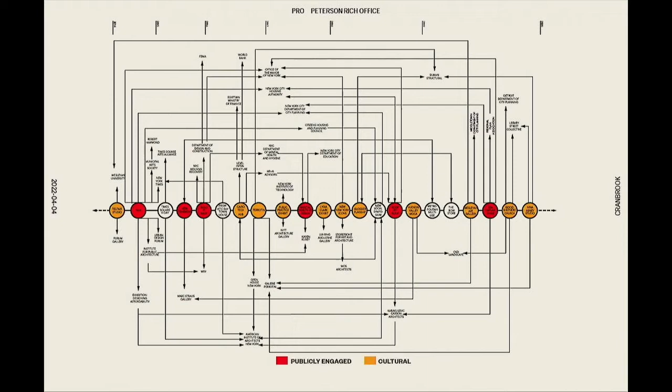Over the course of this timeline, starting at 2014 all the way on the left side of the image up to 2022 now, there's been this kind of ping-ponging back and forth between these two different types of projects. One of the things we've started to see happen as the office has developed, especially in the last few years, is this ping-ponging is slowing down, and instead of there being two separate tracks in the office, these two different types of work are starting to come together.

And the people that we're working with, the nature of the projects that we're working on, are both projects that engage the arts, like all of these yellow projects I was talking about, and also projects that engage issues related to the city, development, social issues.

And so the lecture, we're going to talk about let's say 5 or 6 projects. The last 2 are really one. It goes back and forth between these two different tracks and then ends on the projects we're doing here in Detroit, which really bring these two different lines of inquiry together.

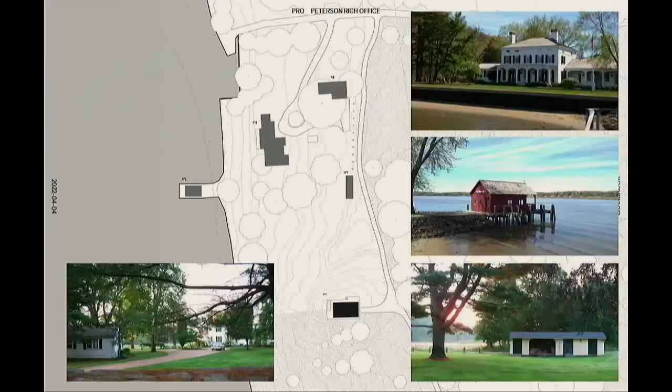Okay, so our first commission project was a painting studio in Lyme, Connecticut for an artist named Tula Telfair. The site was rich with history, located along the Connecticut River with beautiful views of the water. The site itself had served many functions over the years. It was originally the ferry terminal for Lyme, so the main house had been the terminal building. There's a beautiful boathouse floating above the water, and several other structures added over the years to create a kind of loose courtyard.

On one side, the Connecticut River, on the other side, a protected wetlands, and the owner and artist had asked us to design a studio for her in this beautiful landscape.

We had both come from past work experiences. I worked at Tod Williams Billie Tsien for 5 years, Nathan at Steven Holl, and we had spent our careers working on buildings of 100,000 square feet or more, large complex teams of architects inside and outside the office, spending many years working together to coordinate drawings, to start construction. And we were confronted with this kind of perfect little building that we would design, draw, and oversee the construction of completely on our own.

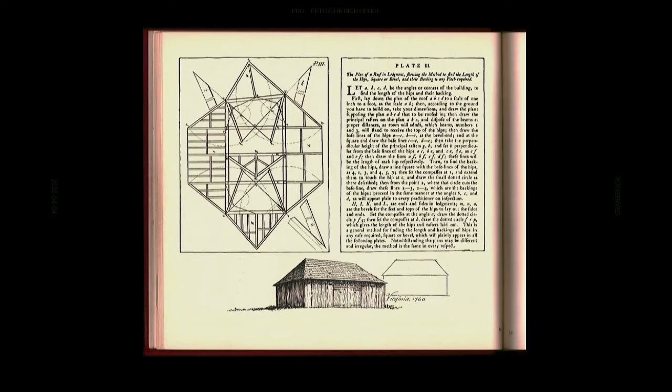But we really hadn't done much with timber construction. And when we were thinking about building a new building within this context of existing historic structures, it was clear to us, for reasons of both budget and practical reality, that it would be a stick frame building. So we started by studying rural barn buildings and historical working buildings in the area, went to barn building books, some do-it-yourself home building manuals, and dug deep into timber framing and all of its wonderful possibilities.

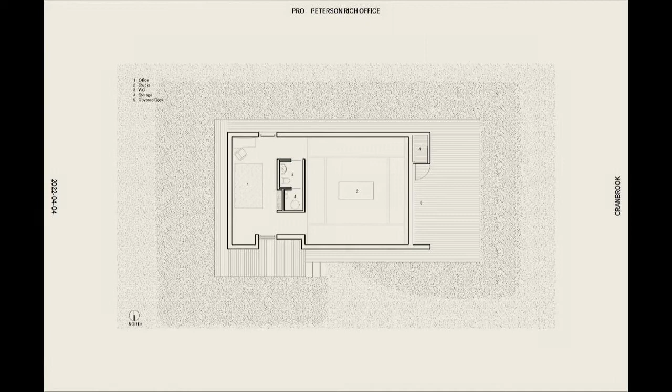The plan for the building itself is very simple, really built around the working style of the artist, who works on several paintings at one time in the round with a single large palette at the center. So the studio is in that square space, with a very tiny bathroom, a small office and library to the left. The asymmetrical hip roof really frames the workspace in the highest volume of the building, coming down in scale at the back where her office and library are located.

Her work is actually fantastical and beautifully photorealistic landscape paintings. And despite the beauty of the surroundings, she wanted no windows out into the actual landscapes around her to distract from her focus of work. So the only openings in the building are these two full-height door and window as you enter, which frame a view of some river birch trees in the distance.

The building is kind of pure in its materiality and form. The base is blackened cedar, and the roof an anodized aluminum roof that reflects the sky, so it relates to the landscape around it.

It's set in a floodplain, so there's a simple deck that wraps the entire structure and allows her to walk around the building without getting into the grasses.

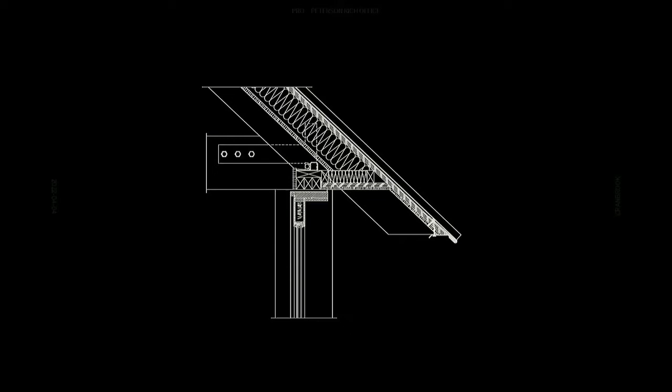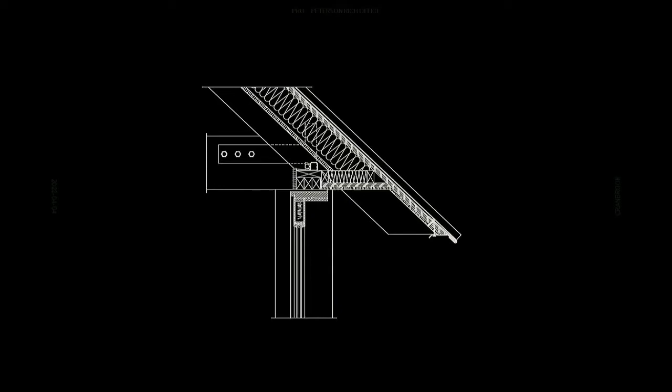So something that seems perhaps simple actually involves quite a lot of effort on the architect's side to detail and consider how everything comes together.

One of the most amazing things for us, having watched Tula work now over, I guess, 8 years in this building, is that the creation of this workspace for her has really facilitated a new level for her own artwork and her creative practice. So for us, it felt very much like a collaboration. Of course, we collaborated on the design, but we feel as though as architects of this space, we really facilitated her own creative practice to take on new legs and go to places it hadn't gone before.

The next project, shortly after completing Telfair Studio, we were given the opportunity to have a fellowship at the Institute for Public Architecture. This was right on the heels of our recently outgoing Mayor de Blasio publishing his housing plan, which had ambitious goals for creating affordable housing in New York City over his 2 terms.

At the same time, the New York City Housing Authority, for those who've been to New York, you'd probably recognize some of these iconic buildings. It's so big that NYCHA, as we call it, is often excluded from major city plans, which is kind of ironic since NYCHA actually houses the most needy of all New Yorkers.

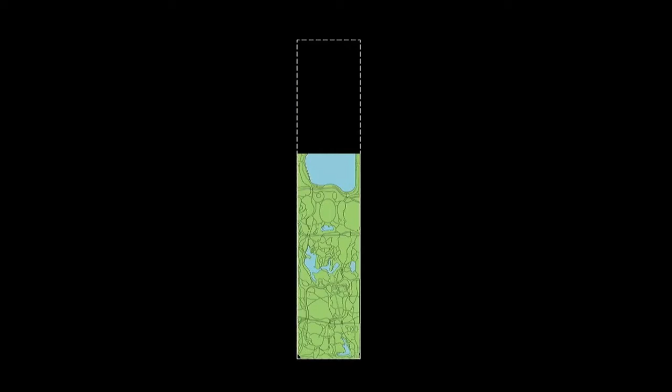If you look at the entire inner ring of New York City, this is a map of all the NYCHA campuses and a tally of all the surface-level parking on those campuses, which together is about 20 million square feet of area, or 2/3 the size of Central Park.

Nathan and I often ask ourselves in our practice, who are we serving? What are we in service of? I think through our work with Nycha, we've recognized our ability as architects to be visual communicators, and to really distill sometimes complex and contentious ideas into palatable visual materials that can be communicated to many audiences and really garner support, but also provide grounds for conversation and consensus building.

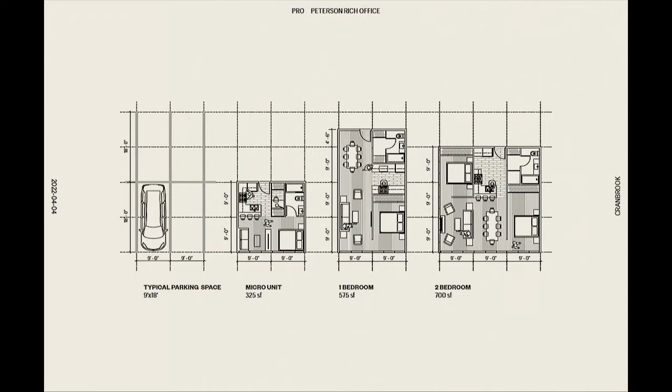So these were a series of drawings we made for 9x18. 9x18 is the dimension of a typical parking space. This drawing illustrates how that same dimension, which any resident can walk outside into their backyard and see and physically understand, could translate into new apartments, micro units, one bedrooms, two bedrooms. Simple visualizations can begin a conversation and empower residents in a discussion about how they might repurpose their backyards.

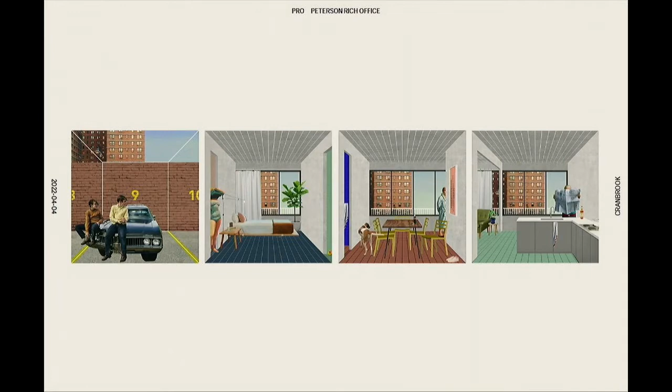Or what kinds of spaces they might trade for infill development on their campuses. This is another set of images from parking lot to apartment building. When we presented this to resident groups, these kinds of drawings became conversation starters for how to negotiate new creative programming on sites and grounds, and also what kinds of buildings and places and other communities they might open up to welcome onto their campuses.

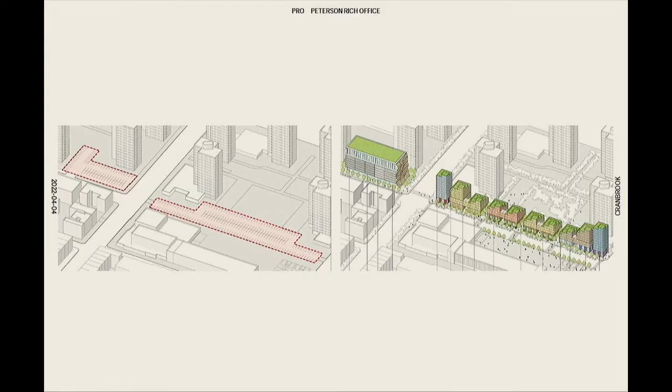As part of our final presentation for this fellowship, the New York Times architecture critic Michael Kimmelman happened by and had been interested in this topic, and so wrote an article about our research piece for the New York Times, which then facilitated what would have been probably a simple summer research fellowship into a whole line of projects and relationships with city agencies, with NYCHA residents, and with NYCHA itself that has continued over the last 8 years, and we'll talk about a little bit more later.

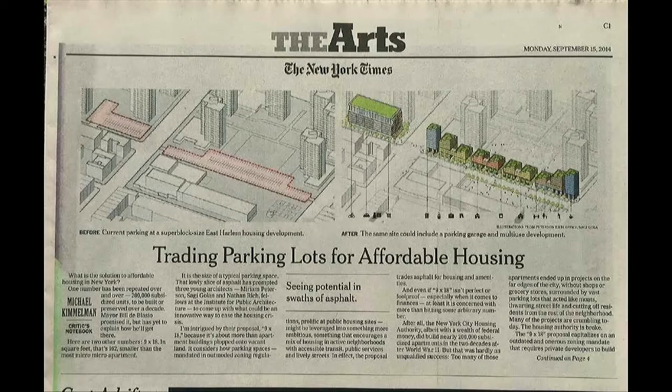The next built project is for Perrotin, New York, an international art gallery. Again, just to contextualize it within the city, Chelsea, which is the neighborhood where most of the art galleries are located, has become mostly residential development. So a lot of the galleries are losing their leases and looking to move other places.

They found, with our help to some extent, the Beckenstein building on the Lower East Side, which had been a fabric company. But like a lot of things on the Lower East Side, which is mostly full of old tenement buildings, the building had been broken up into a lot of different apartments over the years, including the ground floor, which was four different retail spaces when we started working on the project. What is most unique about this building is that the third floor has the highest ceilings in the entire building, 20 feet high. So ideal for a contemporary art gallery, especially one that houses a whole host of different shows, sculptures, paintings, multimedia.

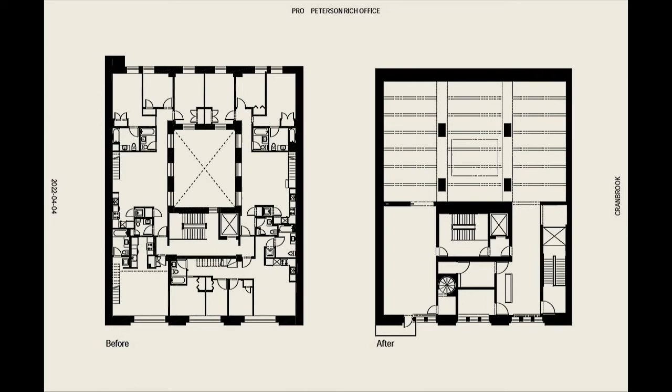So just to show the floor before, part of the work included infilling an existing courtyard to maximize the floor plates for contemporary art. This is just a section showing the before. You can see a skylight above the second level on the street. So we filled in the building on two levels and created a new gallery on the third floor with 20-foot ceilings, 65 feet wide.

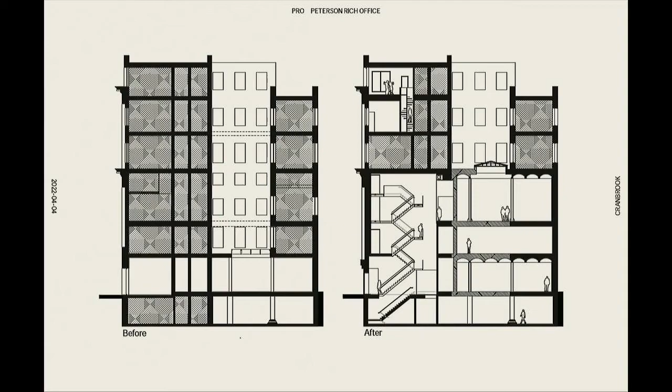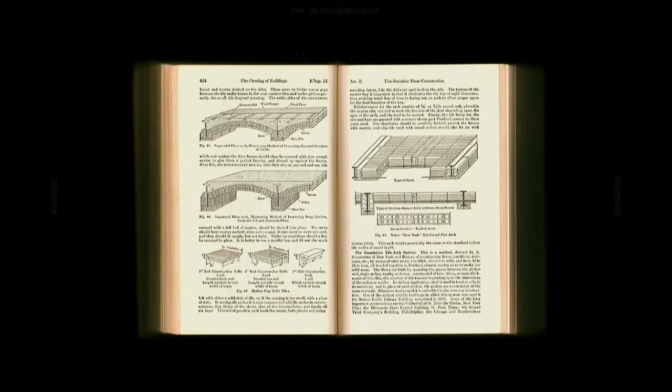Going back to Telfair, where we dug deep into timber framing, this building had an outdated mode of construction, steel purlins and terracotta flat arches, which provide both a robust and strong floor that can carry heavy loads, ideal for an art gallery, but also provided fireproofing for the steel structure. One unique thing about this structural system is that while it's robust, once you undermine one of the existing terracotta arches, you end up having to remove the entire area, so it fails. So we had to very surgically understand the existing conditions of this building in order to transform it into the art spaces the client required.

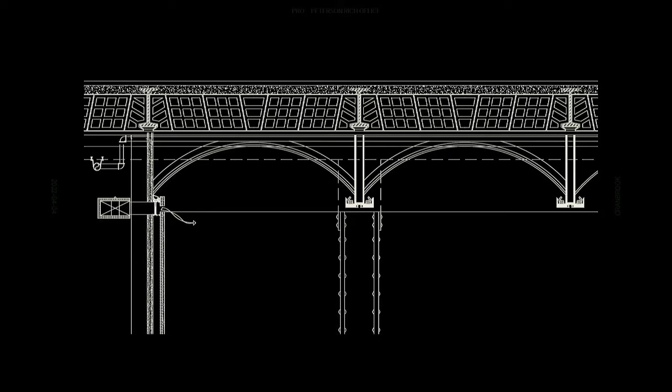Part of the architectural strategy was an expression of these arches, using the steel purlins as the basis. This detail section provides an indirect lighting strategy, where each floor is lit completely consistently, as though by daylight, but each of the bottoms of the arch can be attached back to the steel purlin to provide hanging points for sculptures up to 3,500 pounds. The whole thing becomes a kind of grid or system of infrastructure to provide all the necessary elements of a fully functioning gallery while providing unique architectural identity to the space.

Part of the material palette was the introduction of plate steel, which finds itself in several places of the gallery. We unified the facade of the building with a new plate steel facade that would stand up to the robust brick above. It becomes a wrapper for the entry desk and book display.

The one stair that connects all 3 floors has, I think, 16 tons of plate steel, and becomes a place both for lifting works but also displaying art.

One of the things that for us is most important and exciting about Perrotin in New York is that its 20,000 square feet allow them to host museum scale shows.

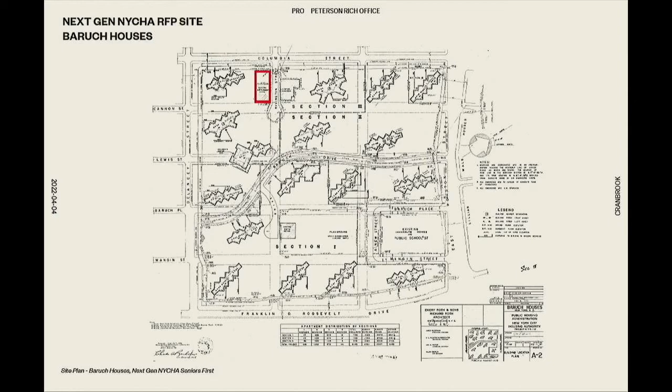So what happened is developers made proposals for these things. It went public, but residents really pushed back on what had been proposed. The reason being that for residents who lived in these developments, the priorities weren't building new developments on the empty land, but instead the fact that their own buildings were leaking, had poor heating, elevators were breaking, boilers were breaking.

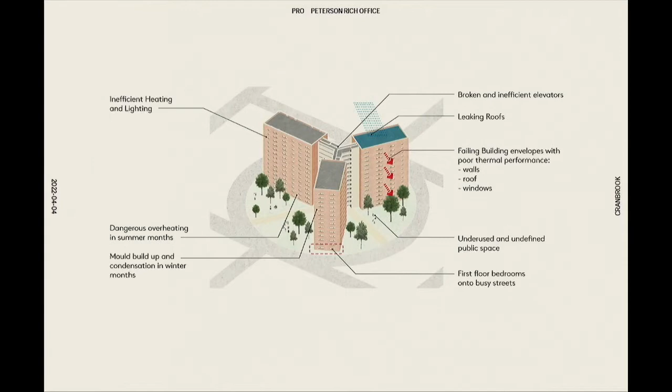Something like 90% of people in 2018 who lived at NYCHA had lost heating at some point. So they basically said, here's a new development happening on our site, but what's it going to do for the problems we're experiencing day-to-day? And they were able to file class action suits in certain cases against some of these developments.

This is on the Upper East Side of Manhattan. A development had basically been approved by the city and was slated to start construction. Design was done. Residents filed suit, and they stopped the development only 2.5 years later. So this was a problem.

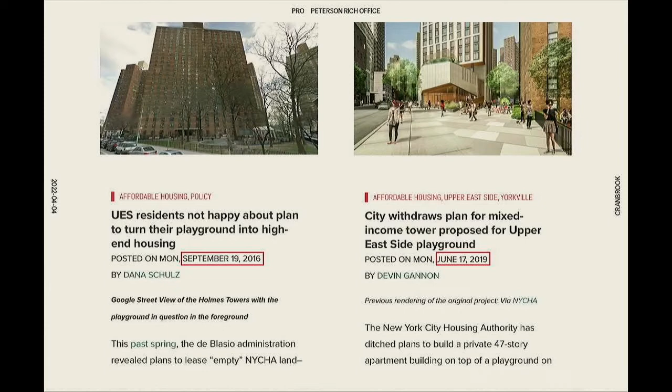NYCHA, who had a major interest in getting a lot of these developments done because they needed to generate revenue, and the city needed to create more affordable housing, had to change up their strategy for how housing or any new construction was going to get done on their sites. And at the core of that strategy had to be the existing buildings and serving residents.

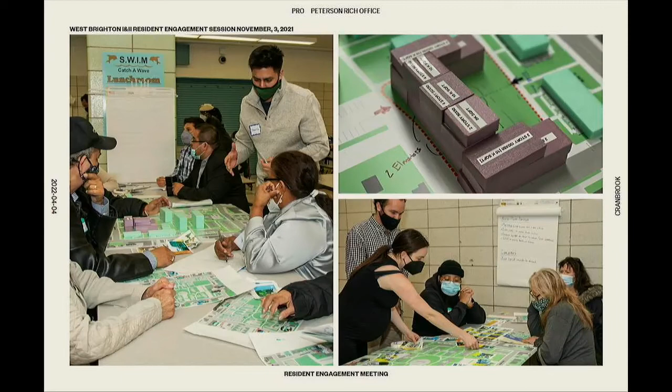We were engaged in this process through our work at the Regional Plan Association, and we had the opportunity to tour a lot of campuses. We started on the ground. This is us on a number of different sites with our team, but also with superintendents, tenant association presidents, people from the Housing Authority, and people from the city. We were also able to host a series of workshops with resident groups to start putting design ideas together based on their input and our expertise.

What was fascinating about this as architects—and Miriam brought up the question of who we serve—is it was a completely different context in which we could practice our work and utilize design thinking and design skills with a different group of people than we normally serve, and in a very different context than we normally work. There was a massive cafeteria with about 8 tables and 120 people, and we were all gathered around these tables on plans we had drawn, sketching and modeling together to generate ideas for some of these sites. It's a fascinating process and very encouraging as architects.

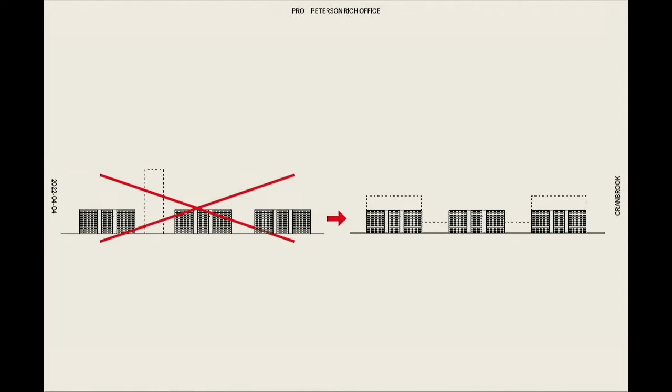Some of the ideas that emerged through this process were that rather than developments targeting a single site on these massive campuses for large-scale development, what if we could come up with strategies that are far more integrated—development strategies that included the existing buildings, the spaces, and the spaces in between the buildings? So we framed a 3-pronged approach to new construction at NYCHA that included preservation of existing buildings, reprogramming of empty spaces in buildings to better serve residents, and new construction.

We tried this out at one particular development in Brooklyn called the Cooper Park Houses—about 650,000 square feet, 1,500 units. Interestingly, there's a massive amount of development rights on these sites because there's so much space in between the buildings. So we really tried to think about all of these variables and how they could serve both development goals and resident needs.

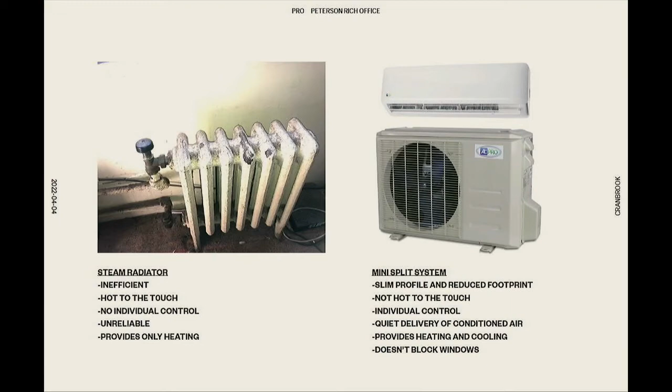We started with the most baseline resident need, which is heating and cooling, and looked at how residents are currently served. In a lot of cases these steam and boiler systems fail, and one of the things we heard most from residents is, how can we get reliable heating and cooling? So we proposed a straightforward electrical mini-split system, and from there started to unravel ideas of how it could impact everybody's day-to-day lives beyond just the heating system itself.

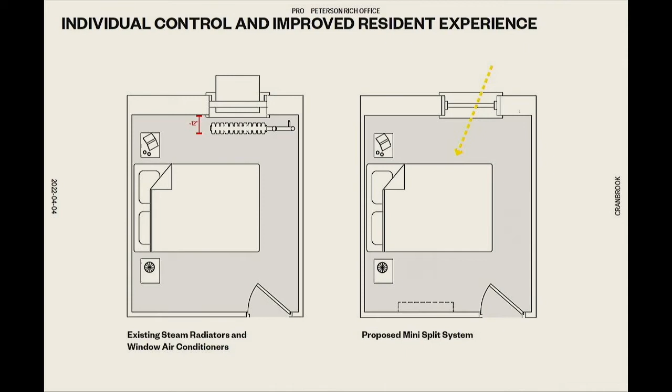Looking at a bedroom space, once you remove a steam radiator and a window unit air conditioner, it suddenly opens up additional space in a very cramped apartment. It also lets more light into the apartment. From there, more ideas started to roll—we had to find places to put the condensers for the mini splits.

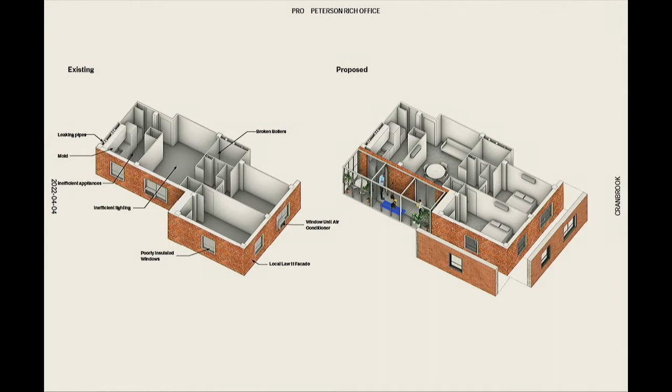This was during the time of COVID, so the idea of privately accessible outdoor space was on the front of everybody's mind in New York City. Unfortunately, we're not privileged to have yards in most cases—it's so dense. So we proposed putting those condensers out on balconies affixed to the sides of the buildings, and those balconies also served as an additional thermal barrier to better insulate some of these buildings.

The rooftops were an opportunity as well. Once you've established these new balconies—there was a major initiative at NYCHA after some of the major flooding events in New York City to bring infrastructure from the basement of the buildings up to the roofs—we said, what if you created an infrastructure layer on the roof and expanded it with solar panels on top? It protects the roof, protects all the equipment moved up there, and starts to create a new space for residents and the people who live there.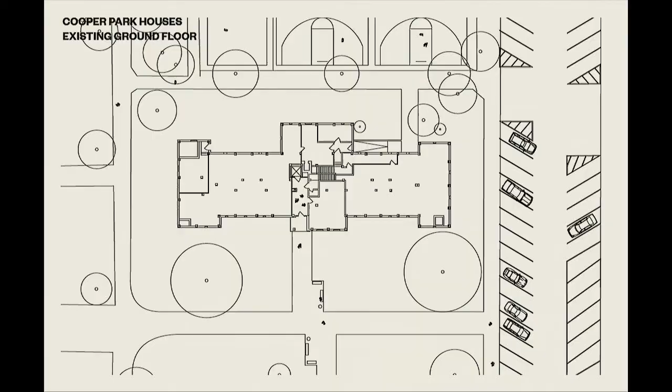And the entry into the housing is set back very far from the street. So imagine an elderly resident having to come with groceries and having to walk a long way to get to their entry.

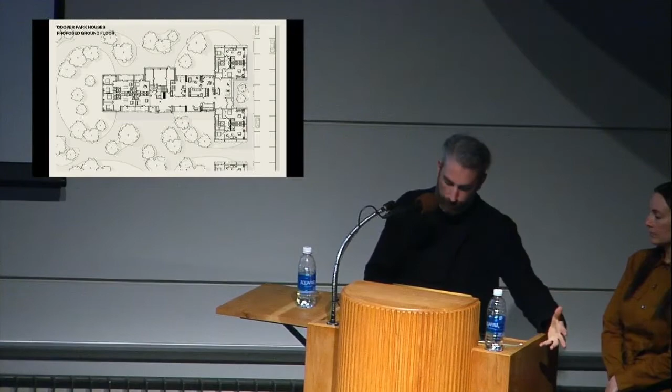So the alternatives we proposed had to do with really activating those ground floors and then expanding on them. In this plan, you're looking at taking over a lot of that empty space for new apartments and new accessible lobby spaces at the fronts of the buildings, for new package rooms, new laundry rooms - all the things we were hearing from residents that they wanted.

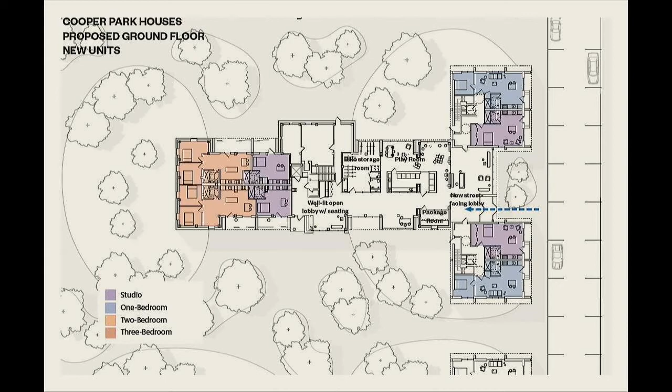The apartments we were adding were studio and one-bedroom apartments, which currently don't actually exist in public housing. It was all built after World War II, based on the nuclear family, 2- and 3-bedroom apartments that don't necessarily serve resident needs now.

So here in these plans, you can see how those extensions worked out. We used this little trick of having the extensions kissing the buildings, which enabled us to avoid having to follow setback laws and to treat these as extensions on the existing buildings.

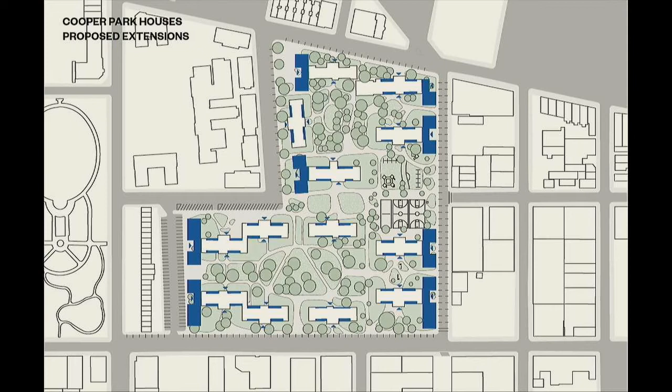And then those extensions became a way of stitching the campuses to the streets that surrounded them. Rather than these buildings pulled back from the streets, where the space in between became almost a moat around the campus that really isolated people already kind of isolated by virtue of their economic position, these new extensions were ways of stitching these developments, and therefore the residents, back into the surrounding urban context.

So with this new development, the breakdown shifts and you get more smaller apartments to better serve the needs of a 2020, 2021, 2022 population.

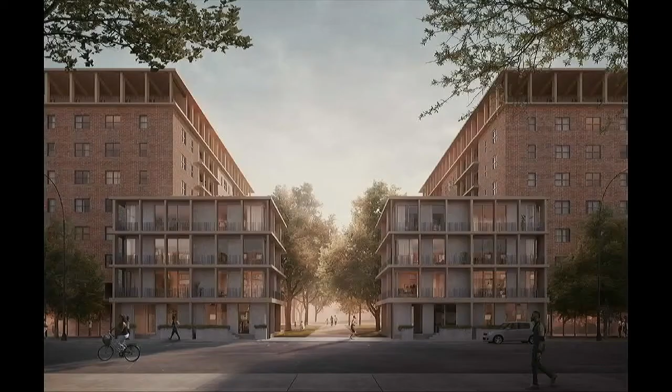So the last project we're going to talk about, which we're excited to share, especially here, is the one we're working on in the East Village with the Library Street Collective. We call it an arts campus because there are actually a number of different pieces and parts to this development.

The campus itself, for those familiar with the neighborhood, is typical of that part of the city - one of these neighborhoods where there's just been decades of attrition, people leaving. In the 90s and early 2000s, I'm sure a lot of people here know much more about this than I do, but the city was basically taking down buildings that had been condemned and become dangerous. And so what was left over was all of this green space.

Our clients who are here tonight, Anthony and JJ, started by purchasing this incredible building called the Good Shepherd Church that was sort of at the core of this neighborhood. Then over time they started to collect a series of adjacent parcels that were typical of this sort of empty green space.

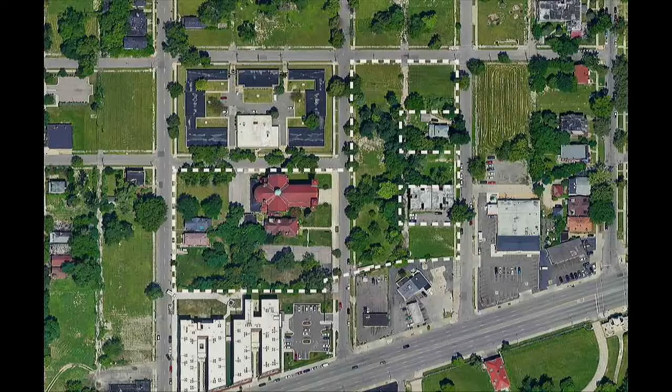What's exceptional about this site is you have an institution that had for a very long time anchored this particular neighborhood as a religious institution. It was a Catholic church, and I think it was in the early 2010s that the congregation had left. But the building, as you can see - this is sort of the way it looked a few years ago and still looks - is in excellent condition.

So this site has this institution, and then it's also got housing, so it's this incredible foundation for generating a neighborhood that's multifaceted and multi-programmed. And it makes sense for this particular client because, for those familiar with the Library Street Collective's work, they work in a lot of different scales and in a lot of different ways.

Everything from spaces like the belt all the way to activations and events, traditional exhibitions in the gallery spaces that they have, and also creating public programs. Like this was a coloring book they created in public schools here in Detroit.

As we started to develop the building, it had to hold up and develop the site more generally, but I'm going to start with the building. It had to hold up to this multifaceted approach to work and all these different types of programming. So that starts with the site.

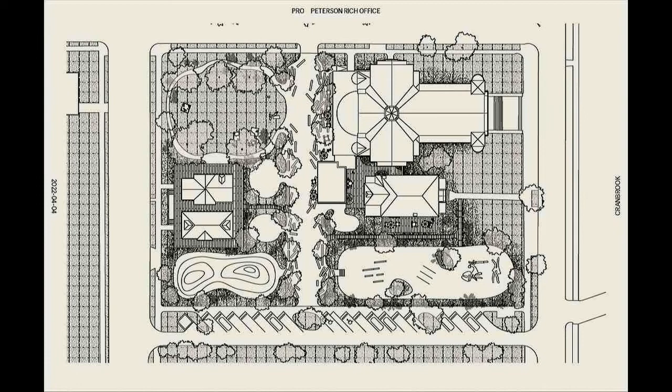We worked with the landscape architects, OSD, on a site that has a lot of different programming on the exterior. It includes sculpture gardens—there's a Charles McGee sculpture park here, spaces for exhibitions scattered around the site, a skate park that the Library Street Collective is working with Tony Hawk to develop, and a large lawn space for events, and then the church itself and the adjacent rectory building.

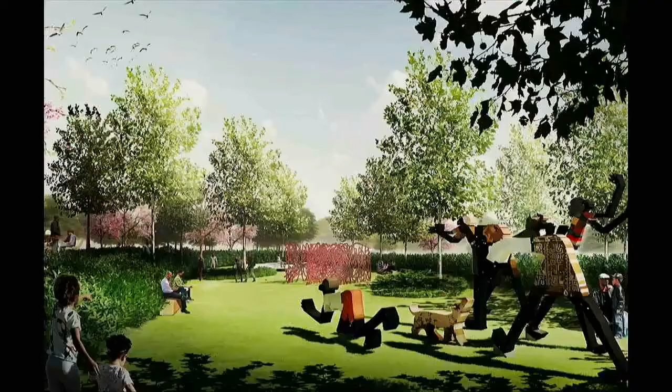Those public spaces—these are images by the landscape firm OSD—are going to be activated with a variety of programs, including a cafe you can see here, incredible gardens and landscape, and here's the Charles McGee Sculpture Park.

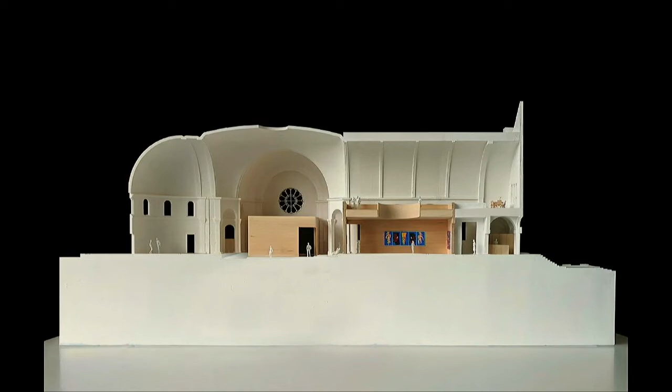The concept had to do with what we call complementary contrast—taking things that are new and inserting them into this old building with its traditional character, to reinforce and improve upon those traditional characteristics. So the new really makes the old look that much better.

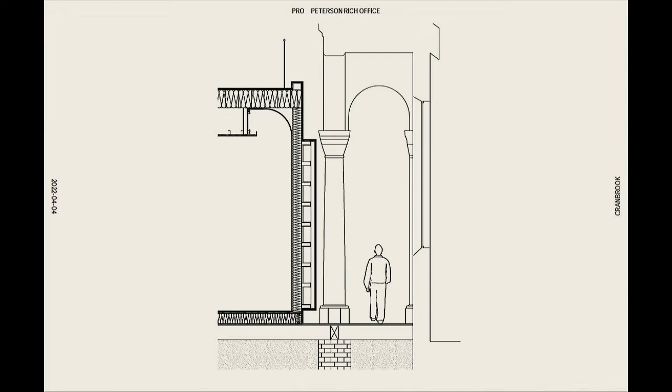This is a section detail from inside the building. As we go into the plan, you're looking at these insertions into the building—a new lobby space with an entry desk and a piece of millwork leading into an office space, and a large new gallery space with an opening at the top that frames views into the old building. Access to the top of that gallery is by a feature stair and a new elevator, creating new spaces inside the church that didn't previously exist.

Another smaller gallery space, a large space for performance, a stage for performance or large-scale sculpture. And we're working with an organization based here in Detroit called the Black Arts Library on a space that will hold their archives and become a resource for the community.

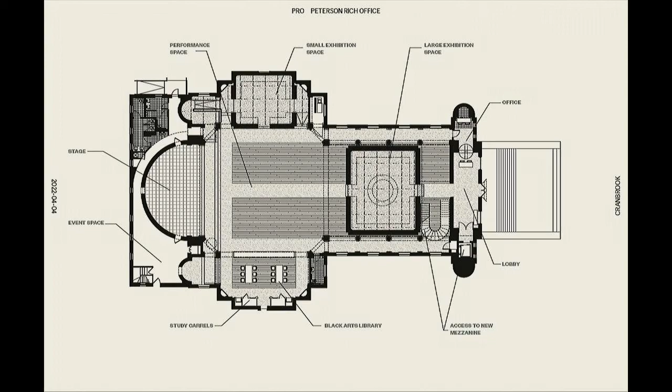So, like I was saying, an organization that works in a lot of different ways, and a building that will support all of those different ways of working and all of those different types of work.

To take you through it a little bit, the exterior of the building remains more or less intact, with a new halo entry around the front of the building, just to signal that something new is inside while really preserving this incredible artifact.

As you enter the building, there's a new lobby space and desk that resonates with some of the original terrazzo floors and incredible details of the space in terms of color and tone, along with new walnut thresholds and bookshelves behind.

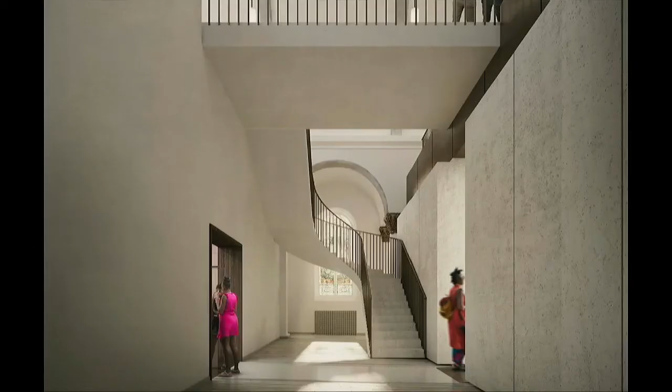As you enter the major church space, you're greeted by this major feature stair—a spiral stair that's actually an arch referencing the arches you start to see throughout the building. You can see one of the original stained glass windows behind the stair here.

So we're starting to create these formal relationships where new and old work together and reinforce one another and talk to one another. That stair brings you up to a bridge that takes you to the top of this gallery box.

From there you can look down over the church space and experience different events happening in it. Inside that first gallery space, there are framing views up to the top of the church, as well as through the building to the back of the church space, where you can see some of the original windows and original lighting of the space.

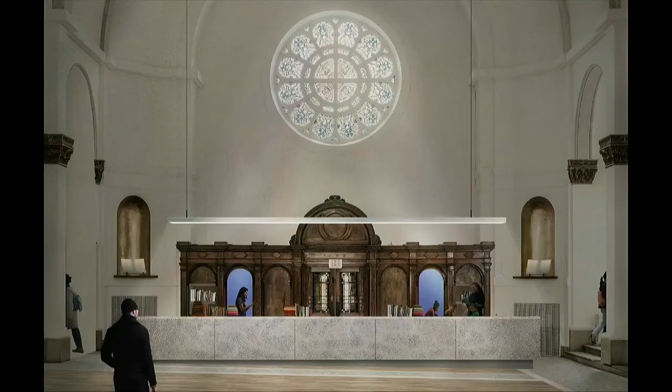Utilizing new lighting strategies throughout that don't compete with the original stained glass windows, but instead create localized light for these specific types of program.

This view is looking towards the Black Arts Library and their archives, where we've created study carrels and nooks where people can utilize the books and go through them, maybe listen to records, and we bring down this large light fixture to change the scale of experience within that space.

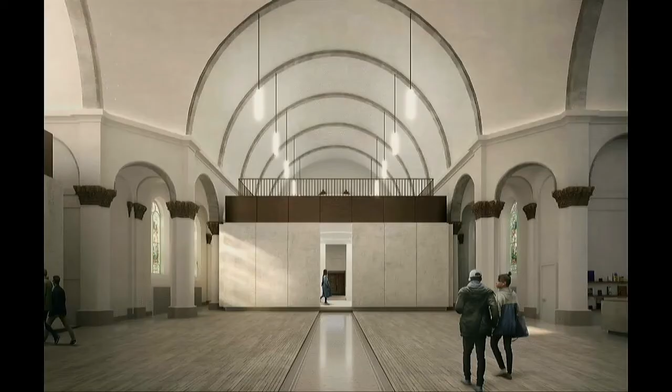Then a view looking back towards that first gallery box, from which you can look down over the rest of the church space. There's this material resonance we're trying to create between some of the original stone detailing and terrazzo detailing in the space and the new materials we're using on the side of the building.

These are micro toppings of concrete, metals to resonate with the original capitals inside of the space, new guardrails with lighter detailing than what you would have seen in the past. But again, this idea of complementary contrast really showing throughout.

So then, to step back outside, as I mentioned at the beginning, this neighborhood has all of this green space, and part of the project are these assembled parcels adjacent to the space, where now that there's an institution under development there—and I'm happy to say we're going to see some mock-ups tomorrow for the church space—there's the question of how you can start to build a neighborhood around that institution.

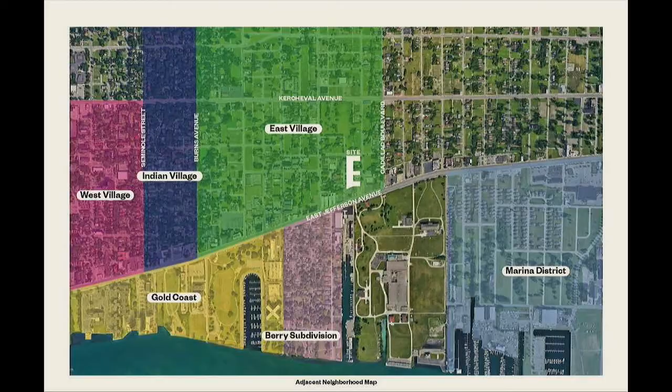As we started to think about these sites, there it is in the middle, this kind of E shape, we started by looking at the adjacent neighborhoods, the East Village, the Marina District, Indian Village, to understand some of the essential housing typologies and building typologies that exist in this part of Detroit, using that same research-based approach that Miriam talked about at the studio and at the gallery, where we look into the histories of these areas.

We also did this here. So you look at these traditional building types, it's familiar suburban style development, detached buildings set back from the street with individual driveways and front walks, where, as anybody who's lived in those circumstances knows, you have a very private experience of driving home from the street and don't necessarily get to know the people that live around you.

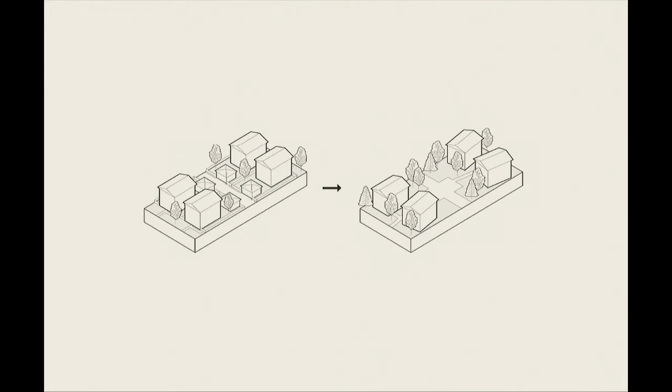So in trying to create a new neighborhood in this area, one of the things we decided to try to do, working with the clients, is create shared spaces—new typologies of collective living in this semi-suburban context. So instead of individual garages, shared parking along a central new street. Instead of private entries into the buildings, collective entries from the center of the site.

And so we created 5 goals and ambitions for this development. The first was porosity with the neighborhood—an openness to the surrounding context, so that it wasn't a closed village or an enclave, but instead one that started to generate new activity around it.

The second was community through shared space, this idea of the openings to the buildings actually facing inward, so that there were collective zones where people would get to know each other, experience one another, unplanned interactions with your neighbors.

Some private outdoor spaces for individual residents, and you'll see some of the artist studios that are going to be in the development. Flexible ground floor space for those studios and for some commercial activity to bring different types of energy at different times of day to the neighborhood.

And then lastly, economy of construction and affordability was essential so that you could really serve both some of the residents living there and broader populations around the city of Detroit.

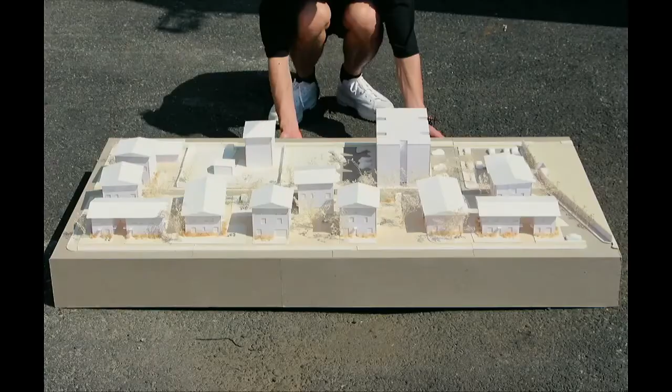So this was our early study model of the development. We decided to create a series of detached buildings, which was at scale with the rest of the context and neighborhood—multi-unit buildings, but no more than 3 or 4 units per building, and a variety of different types of openings into the development that serve different types of purposes.

Another one of the characteristics we really wanted to draw out that exists in the neighborhood now are these incredible trees. One of the features of this green space is that the trees have thrived, and a number of them are in excellent condition. So we did an analysis with some of our engineers of which trees were in great shape and worth preserving.

We went through all of them and identified the ones that could help shape our plan—which trees could we preserve to help enliven the character of the neighborhood, and how could the buildings take shape around them? The plan really did start to develop based on this concept of different types of openings to the streets, shared spaces, and the locations of the trees.

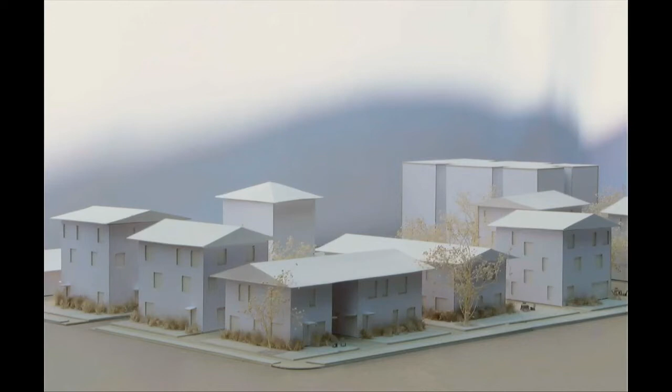There's obviously a very strong relationship to the church too, which I'll talk about in more detail. In terms of how the buildings relate to the surrounding context, there are openings between some buildings—larger openings between separate buildings, and smaller openings forming alleyways and entries—creating a very dynamic elevation on the street.

Rather than creating a barrier of parking like on the Nycha site, there's a semi-public drive running south to north across the site, through which residents can access shared parking clusters—another opportunity for neighbors to get to know each other rather than pulling up to individual driveways.

There's also a notion of porosity, with lots of different entry points across the site connecting to the surrounding context—shared entry points and shared walkways, places where people might get to know each other, and ways of enlivening the adjacent streets.

This is a view of the model looking at that street, where you can see one of the shared parking clusters and its relationship to a neighboring courtyard space surrounded by four buildings—really trying to create a dynamic set of relationships between form, open space, and parking.

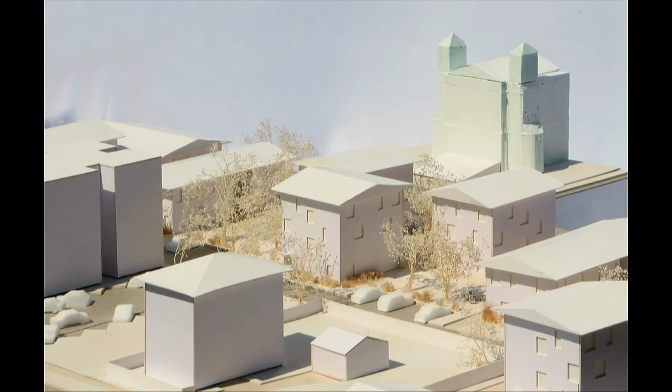Along those lines, a series of courtyards open not toward the street but toward this semi-public street at the middle, really trying to create a feeling of enclosure but also shared spaces—these sort of C shapes as you work your way up from south to north.

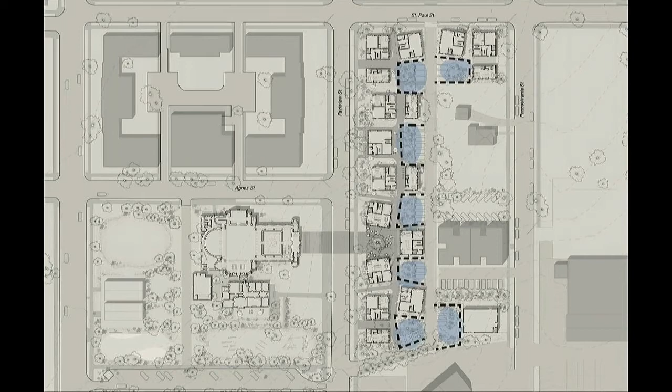Inside the development, we've tried to extend the eaves of the roofs four feet to create a feeling of coverage, something we've noticed just walking around this campus—incredibly important on a day like this in Michigan—but it also creates a feeling of enclosure as you walk through the site, almost like a village or neighborhood.

There's an incredible desire in Detroit, and a lack of studio space. So this is a place where we could activate these ground floors with studio spaces visible from the outside, creating another overlay of community in the development.

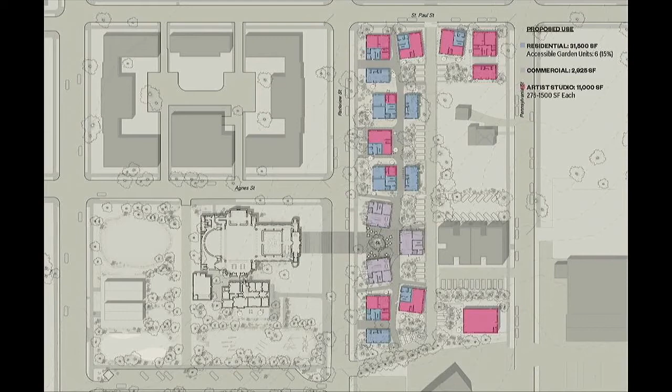At the core of the site is a public space facing off with the church, where commercial, retail, or food and beverage programming would open onto this plaza to really activate it—so you can imagine how this space could reinforce an event at the church.

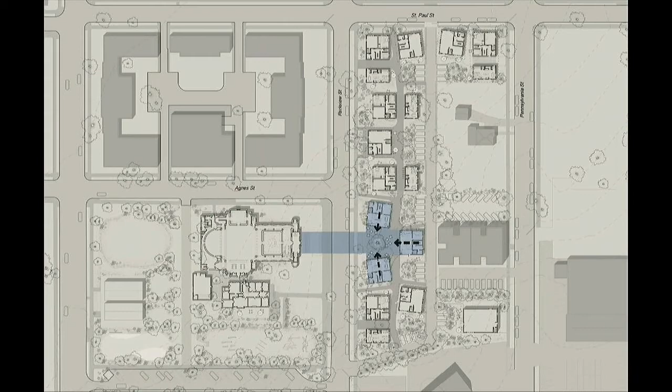Let's say there's an opening or a concert at the church—people could spill out across this new walk, down the stairs at the front of the church, across the street onto this new plaza where food and beverage programming might support them there.

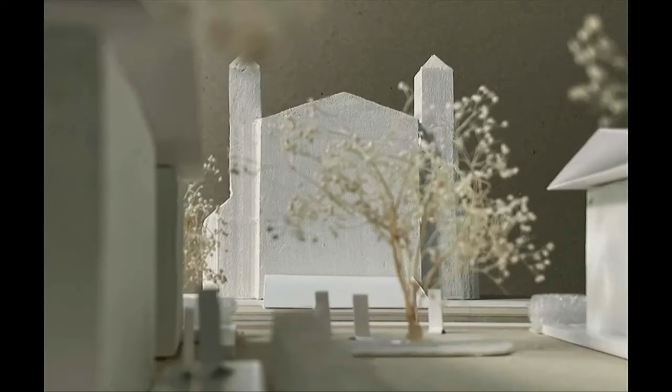Here's a zoom into that moment of density of activity and density of planting—you can see the presence of some of these old trees in the development, and a view looking back toward the church from inside the development.

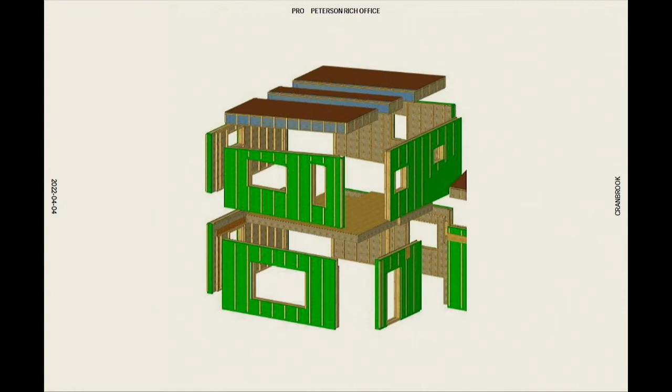The last point concerns affordability and economy of construction. We've been working with a couple of organizations that prefabricate walls and wall systems—one based in Toronto, another in South Dakota—who are currently competing for a role in the project. The idea is to create this active, energized place through economical construction means, using these prefabricated wall systems.

And we'll leave it there. Thank you so much.